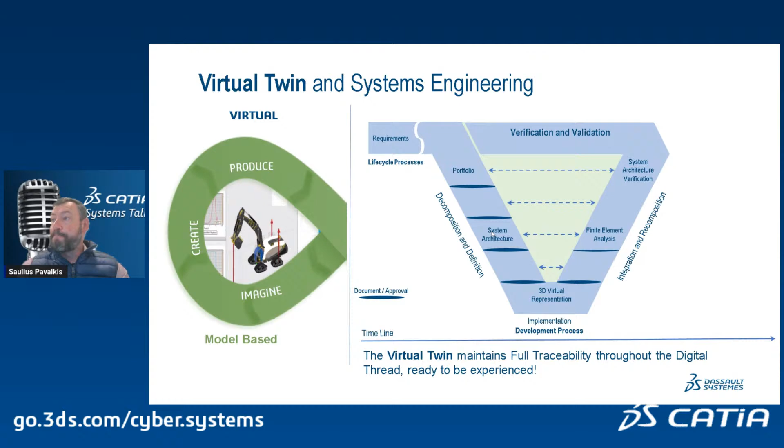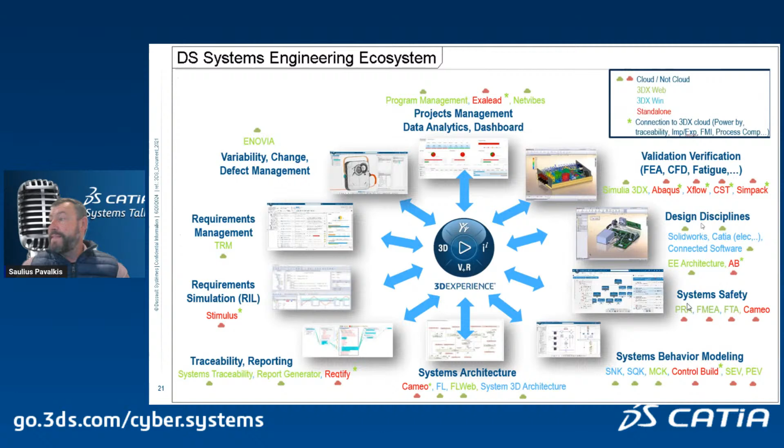From the DS perspective, the DS has a lot of tools and solutions for system engineering that would include project management, configuration management, requirement simulation, traceability, digital thread, system architecture, as you can see here, CATIA Magic. System behavior simulation, multi-physics simulation with Dymola, safety analysis, design disciplines like mechanical, electrical design, and then validation and verification.

Now going back to our SysML model of integrations, here you see CATIA Magic, Teamwork plugins, Teamwork Cloud, and here we see updated relations to 3D Experience platform and standalone apps. So this view is from our internal alignment perspective in the company.

So we have Power'By, like SSP standard, which we discuss in this presentation. This is coming as a new thing, and you can find this model and presentation of this model actually in the community post. Here is the community, and here is direct link, so those slides will be shared, and you can copy direct link if you wish.

So now in part 2, we will talk about model-based design reviews, which is one of the major scenarios of the application of model-based digital engineering. Then we'll talk about Power'By in connection of one of the integrations like SolidWorks. Then we'll talk about server-side simulation, Internet of Things, and hardware in the loop. Wire harness, which is very good alignment between system engineering and electrical engineering. And we'll show new samples, system virtual validation sample and solution, and cyber system governance for software.

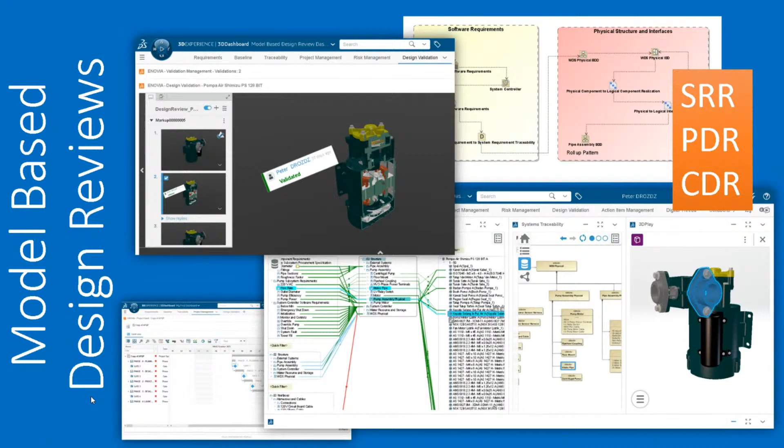So from model-based design reviews, why is it an important scenario? Because design reviews are done as a formal process to approve a next round of financing. So if you pass design review of your product solution, you can expect that maybe some issues will be found. But then after review of the design, you will be granted next level of finance, and you can continue working. So this is very important, not only technically, but also a very important business step.

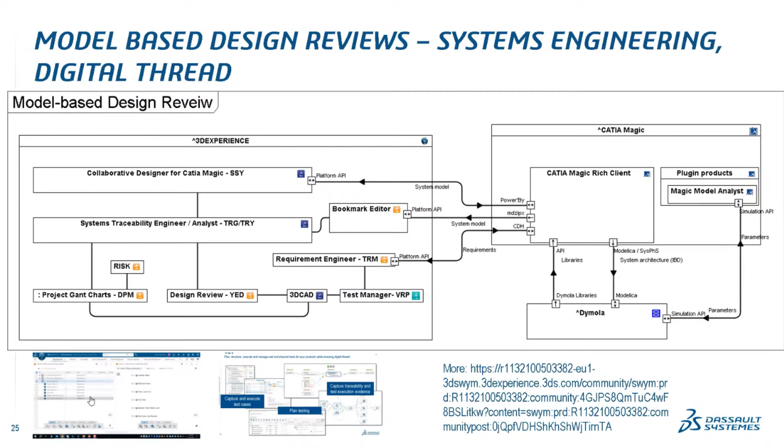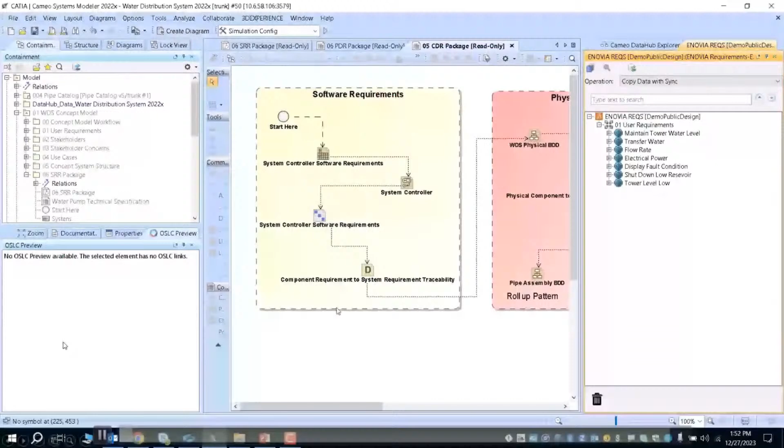And it is mostly performed in the non-virtual manner, but people still gather together, still have PowerPoint, still have data coming from PDFs and Excel. And what we suggest, there is really no limitation on making it digitally already.

And we are demonstrating in this scenario how this process can be integrated through 3D Experience platform, through Cameo, CATIA Magic. Then we are delivering system architecture requirements and the high-level design from SysML, and we are integrating with the detailed design, and we have tasks, we have risks, we have gateways, we have checklists where we can upload, where we can collaborate, where we can manage baseline and deliver collaboration on the specific review digitally.

Here you see dashboard, which consists of requirements, baseline, traceability, project management, risk management, including requirements. Here we see baseline of the artifacts which we are delivering. Every tab has associated specific app where we can perform a task dedicated for that role.

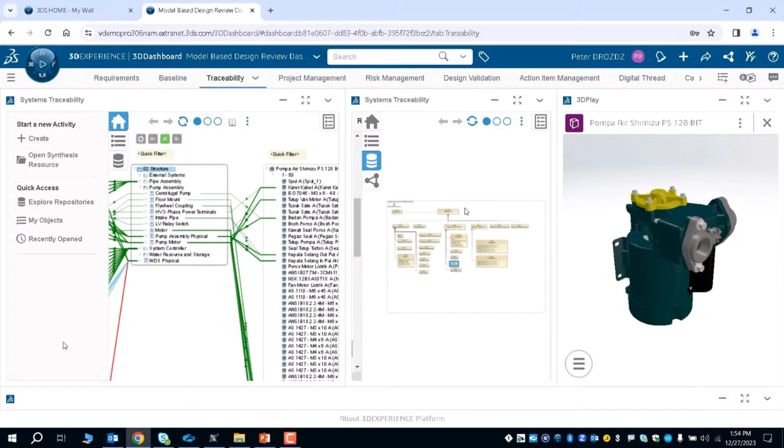So this process is one of the best examples how we can reuse digital engineering ecosystem like 3D Experience platform for model-based system engineering needs, because we want notifications. We want integration to the design. We want collaboration applications like for 3D mechanical collaborations to review that data. We want to gather and govern baseline of the data review. And we want that it all would be digital and all collaborated between different roles with different dashboards.

So this process is actually available. You can find more about it. And every part of this presentation has a link where you can actually see more on this topic, including on this one. I will not go through this whole presentation because this would take more time than we have today. But I can just tell that already like 10 different clients are evaluating and some applying already this process. And this is very promising for the future too.

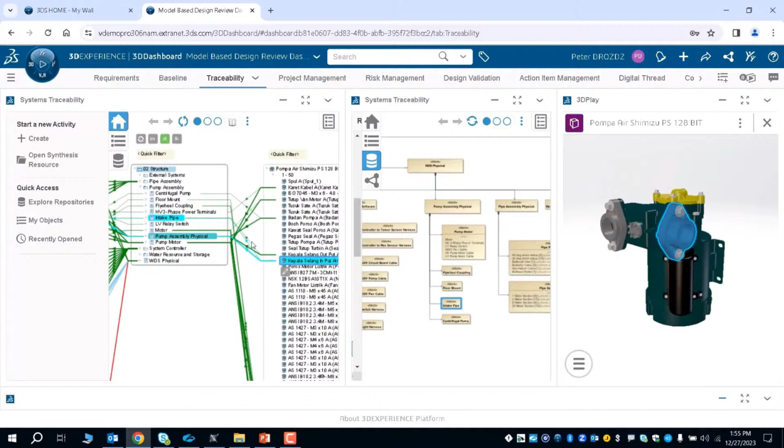Now, going from that perspective, we have integration between different disciplines. So one of the disciplines in mechanical engineering, and one of the common used tools for mechanical engineering, also produced by Dassault, is SolidWorks. And so how we could align between SolidWorks and CATIA Magic.

So there is one way to do it, which would not require actual manual work. Here you have opportunity to commit your project and work, same as with Teamwork Cloud, but with 3D Experience Platform using the concept of Power'By.

So Power'By is the ability to even open CATIA Magic and SolidWorks from 3D Experience Platform, load the data, work on the data with the right granularity, commit the data in the team, you can collaborate, and then the data becomes available, and then you can have the digital thread between system engineering and, in this case, mechanical design and SolidWorks. You can always open this web interface and see what traces to what, on what requirements we are working, but work in the native environment, SolidWorks and CATIA Magic.

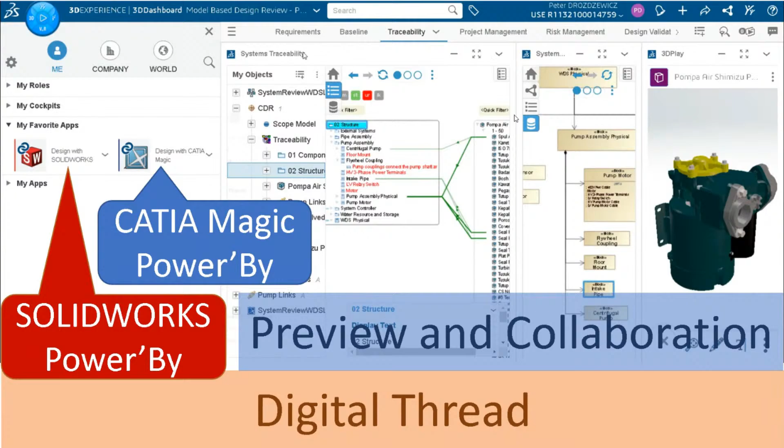So here is that scenario, and again, you can read more about that. We have Power'By from CATIA Magic. We have Power'By for SolidWorks. There is dedicated apps like Collaborative Designer for SolidWorks and CATIA Magic. And then we have digital thread between them, app, Systems Traceability Engineer.

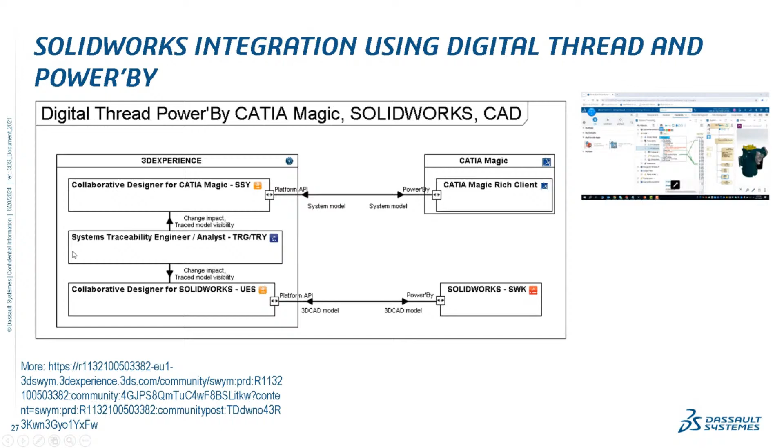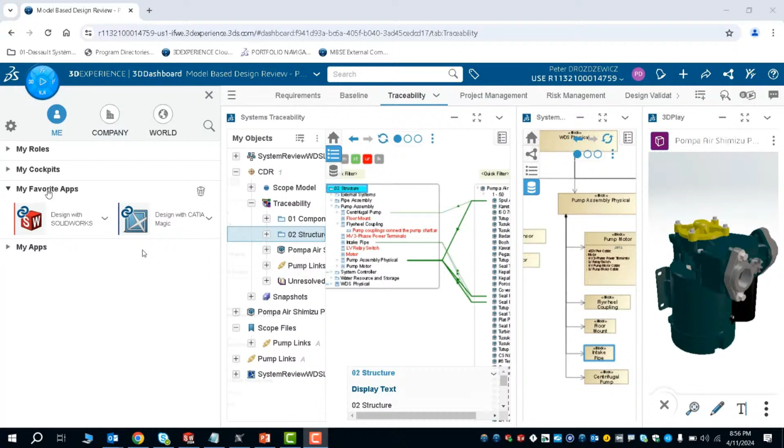Now, how that looks like in action. So here you can see a short video. We have icons, apps to open CATIA Magic. Still, you need to install CATIA Magic separately, but in the future, actually click on that icon will install CATIA Magic automatically. This is just a way to find it faster and start work faster.

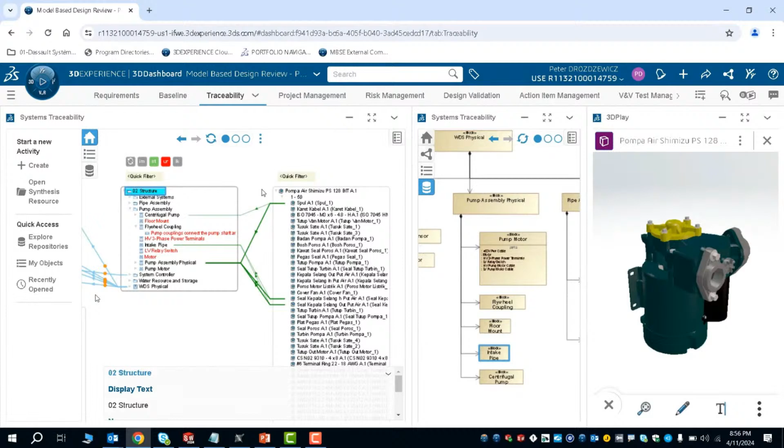And here you can see that the digital thread is already enabled. Here you have traceability from requirements to system architecture to the mechanical design. This is performed here manually by knowing what to implement, what is actually on what part in the SolidWorks we are working, and what is the pretty much system architecture which it needs to implement.

And that traceability in any case is needed, right? So just here we will elevate the level of that system traceability from pure requirements to actually models. So then we can know if we change the model, what would happen.

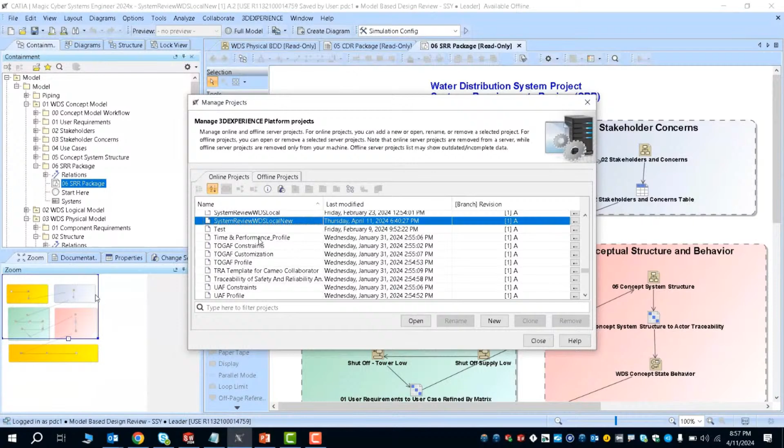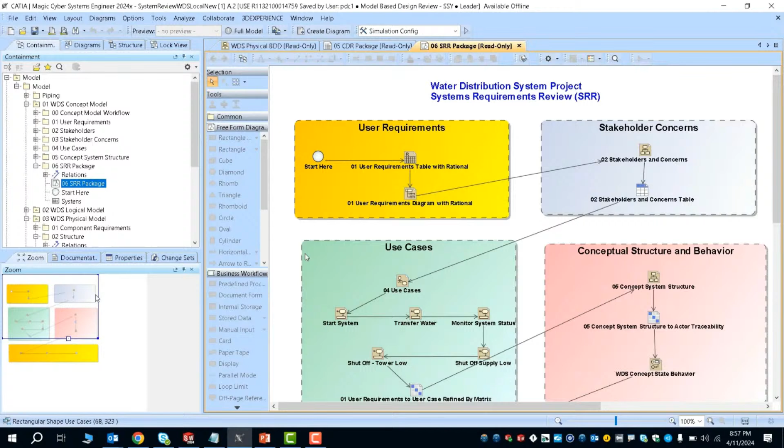So here you see actually we are committing project data from CATIA Magic using Power'By, and we can see projects list. And this looks like Teamwork Cloud. It's actually just alternative for Teamwork Cloud when you work with 3D Experience Platform. Then you are working directly, committing data to 3D Experience Platform. Same works from SolidWorks, and then the data becomes available for trace, for analysis, for the rest of the workflow.

Here we see in SolidWorks how that looks like. You see the screen on the right side, that's connection to 3D Experience Platform, ability to load the models, and you see I'm connecting to the 3D Experience Platform. I'm loading the model, same Power'By concept, same way to work. You load the data, you work on the data native app, and then you commit the data to get the rest of the workflow accomplished.

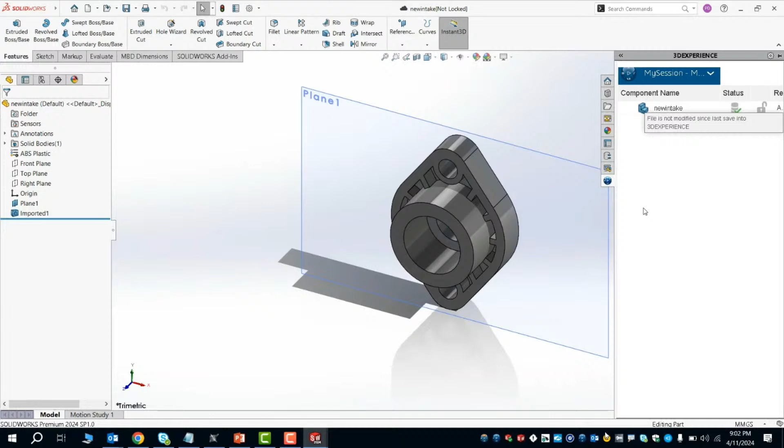So here we see we work with the data, we load the data, and when we are ready, we can upload the data back. You can work on part of the model, you can work on full model. And here we have this full digital thread. Okay, that was Power'By with the SolidWorks and CATIA Magic.

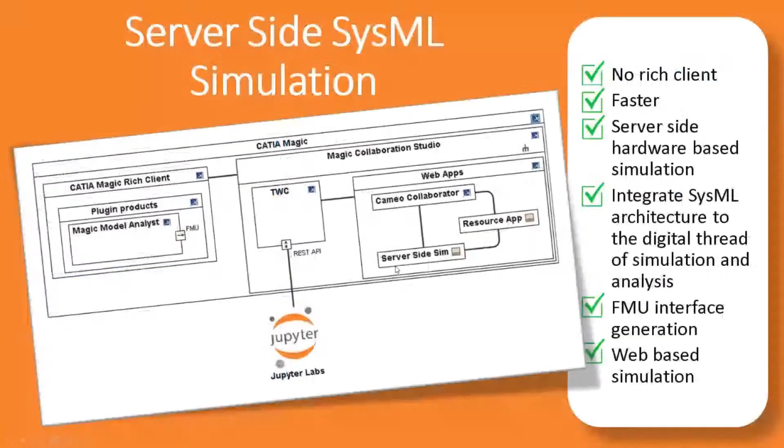Now let's switch the gears and let's talk about server-side simulation. This is simulation which we enable SysML, UML, UAF simulation directly in Teamwork Cloud side. What do we get from that? We get ability to run simulations faster, the ability to integrate those simulations because now you don't need to run client-side software to execute the model. You can generate FMU to server-side. You can use web-based simulation interfaces.

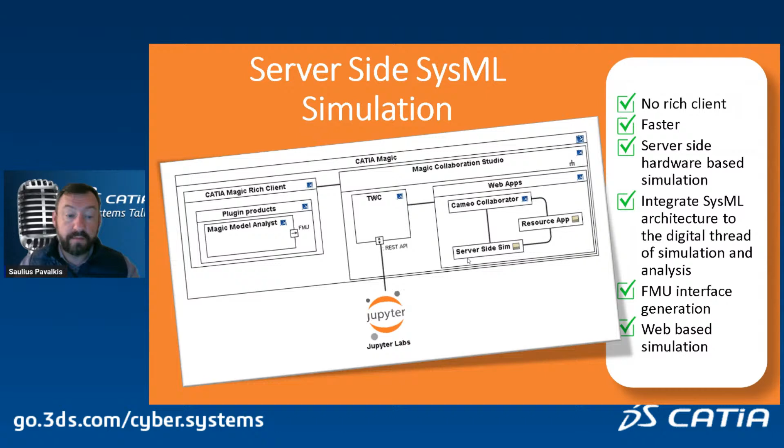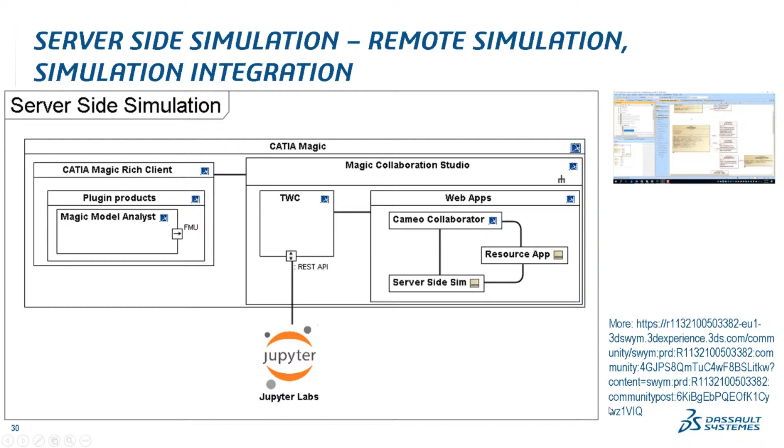So how that looks like, here we have architecture of the solution. We see Teamwork Cloud through REST API, and one of the clients is like Cameo Collaborator, another client is Jupyter Labs. And here again is the link in the MBSE community where you can find more about this. How this works, let's see short video.

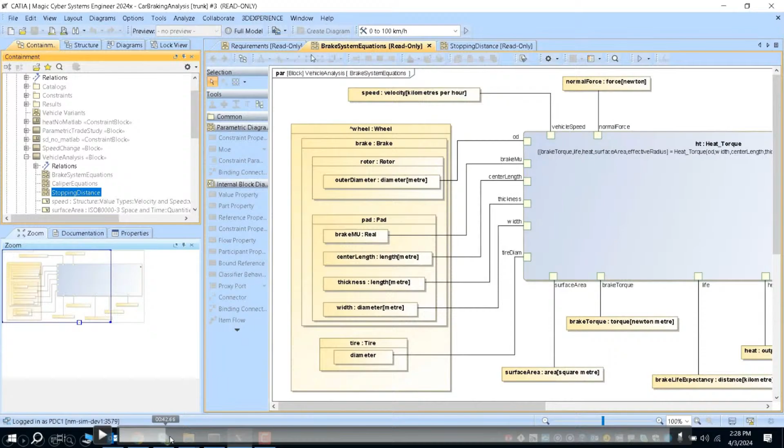So here we have sample for car brake analysis. And that sample is committed to Teamwork Cloud. So once it is committed to Teamwork Cloud, you can run it from Cameo Collaborator. You can run from Cameo Collaborator directly changing the input values and executing here. And following release, July 2024 refresh one, you will be able to see in Cameo Collaborator even visually diagram simulation. So states, activities, visual drawings will be in Cameo Collaborator, animated visual diagrams.

We can also run the simulation through Jupyter Labs, so you can connect to Teamwork Cloud, execute the model, get results, compare results between different models, connect to other tools, and execute. That's how simulation orchestration is performed and should be performed in the future with other tools.

Here we see a web interface running simulations from Cameo Collaborator. In the upcoming July release this year, we'll have even diagram simulation inside of Cameo Collaborator.

Another topic is hardware in the loop. This year, and actually a few years ago, we spent investigating the best methods to make a connection from virtual to real. This topic is very big because there are a lot of different hardwares, and we have a few solutions for that. Let's concentrate on CATIA Magic integration to Internet of Things and the hardware in the loop topic.

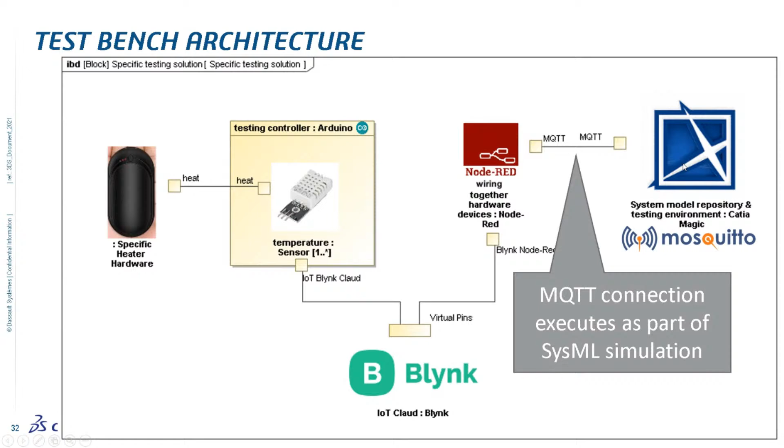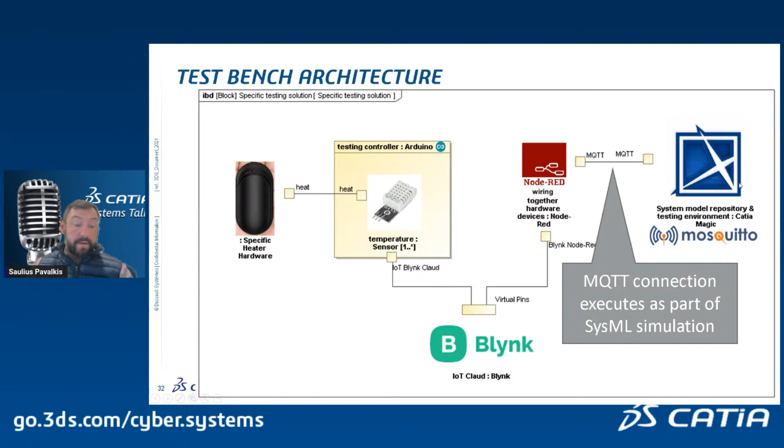In this sample, we use Node-RED to connect to the IoT platform Blynk, which allows you to access data anywhere in the world because it runs like on a server. Then through the hardware, the hardware is publishing to the IoT platform. This is not a must integration; it could be hardware to CATIA Magic directly or somehow else, but we just wanted to have a flexible interface here.

As you can see here is the usage of the MQTT library. We have open connection, where we specify what server we are connecting to, and the credentials. Then we have publish, so you publish on a topic, and that's it. You just choose the topic where you publish, for example property name—that's the topic. And then you have subscribe.

Subscribe is to wait for the topic. Here we subscribe—actually this is the subscribe, so we are sending data to a specific topic. Actually, we are sending the topic here to subscribe, and then we get the data back. In case of publish, we are actually sending the topic and the data, because we need to publish to a specific topic. And that's it, that's how it works.

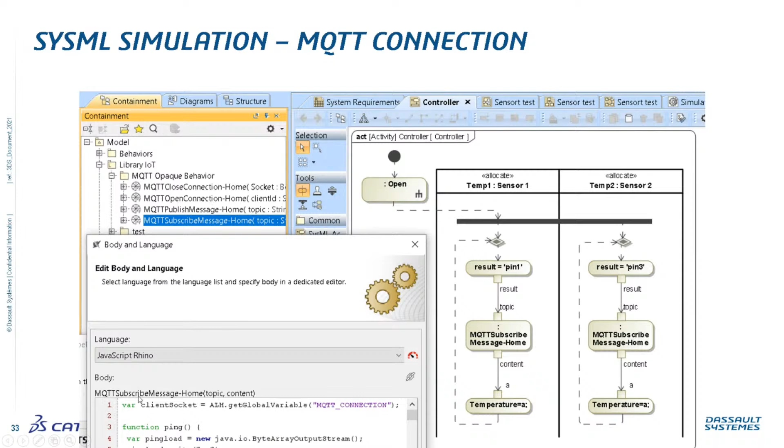You don't need to be an expert on that library implementation; you just drag those blocks and you get results. Here we have a sample which demonstrates that you can actually read the data of temperature from two sensors connected to hardware.

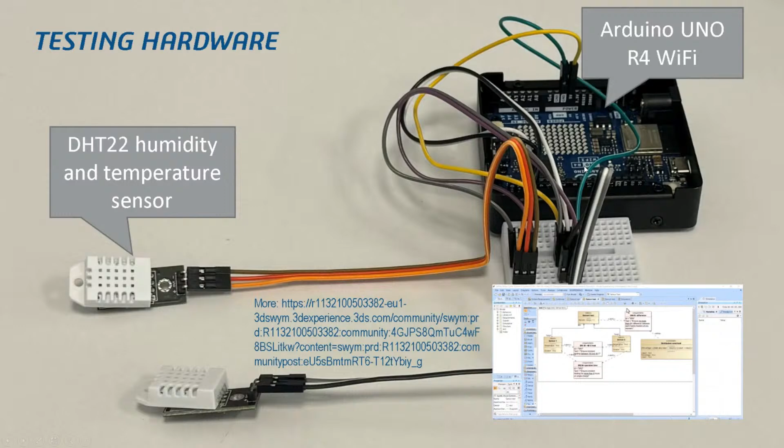That hardware could be like Arduino, could be ESP, could be Raspberry Pi, could be anything else. As a result, you are reading the data into the model, and in the model we have requirements, we have system architecture, just as you would model without any kind of extra things. As you see, this model is not overcrowded with mechanical structures to integrate, but it uses that library—those four, actually almost three, opaque behaviors—to publish and subscribe to the topics. That's it: from those topics, which are like properties, you get updates and you send updates.

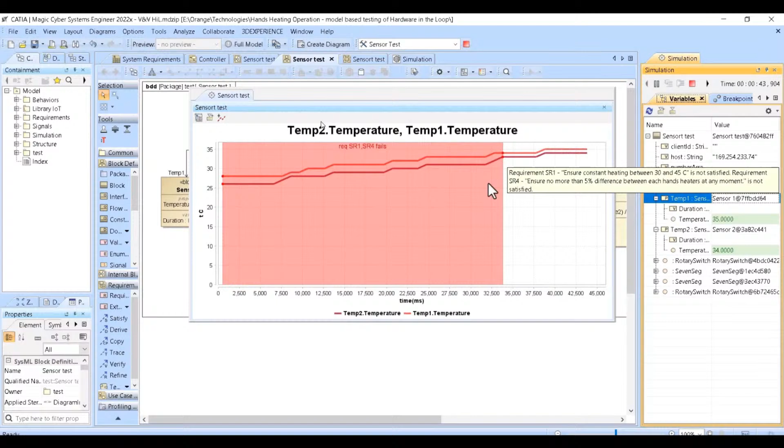Here we see two requirements verifications performed. The requirements are, in this case, that the difference between the sensors is no more than 5%. So if we have heating equipment which needs to stay within some boundaries between each other, this tests that, and also that the heat reaches the target level in the right amount of time—how long it will take to heat from the room temperature to the right amount.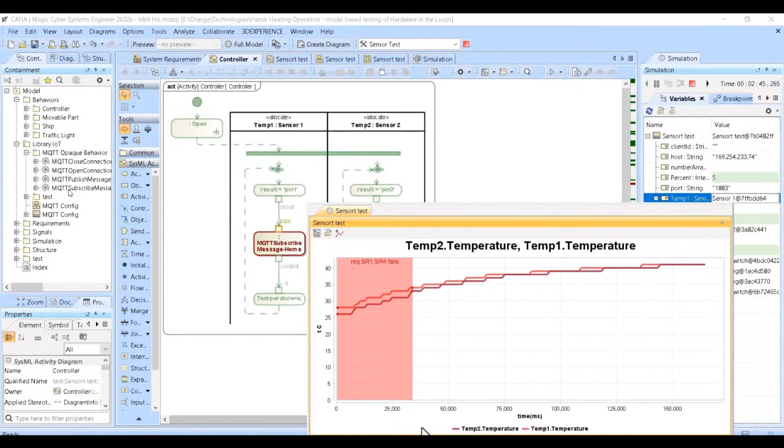Here is the library you can download that will allow you to communicate with MQTT. MQTT is supported directly by hardware, so you can connect directly to the hardware through the MQTT server. Here we are using Node-RED in between, which is a low-code connection interface, open source.

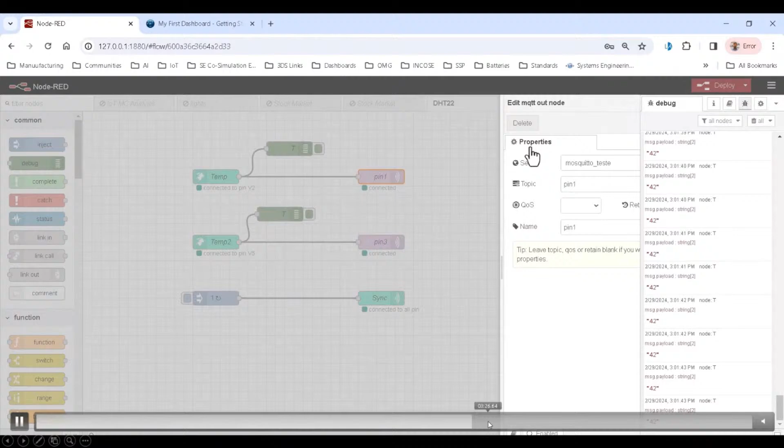Why are we using it? Because it allows us to have 5,000 connectors to anything else, and also we are using Blynk. Why Blynk? Because you can access dashboards remotely from your mobile phone or elsewhere, and communicate with this IoT software anywhere in the world to gather data, for example from tractors running in your field. The data doesn't necessarily need to be consumed by Cameo—you can store it in a database, but Cameo can check the architecture real-time, optimizing that.

So here we see this dashboard, and this is the Blynk-specific IoT solution.

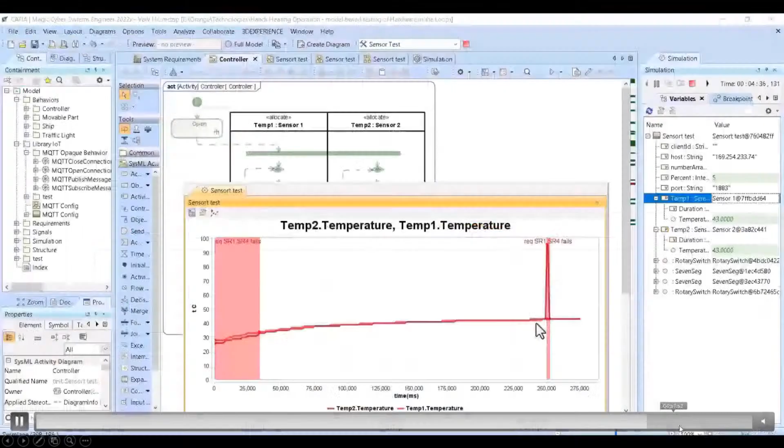Now let's switch to another solution where we have an updated project for eVTOL, demonstrating electrical integration and 3D wire harness. In this case, the architecture is that Cameo is providing requirements and system architecture, and all of that is used in traceability to the electrical 3D design, system design, which is the schematics, and all of that is governed by traceability and baselines.

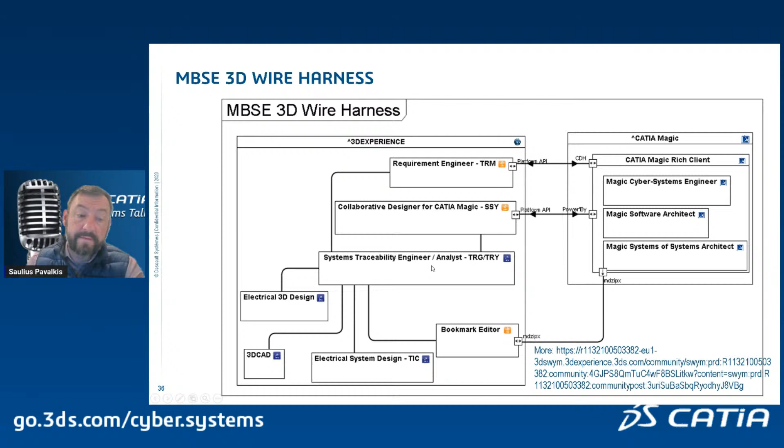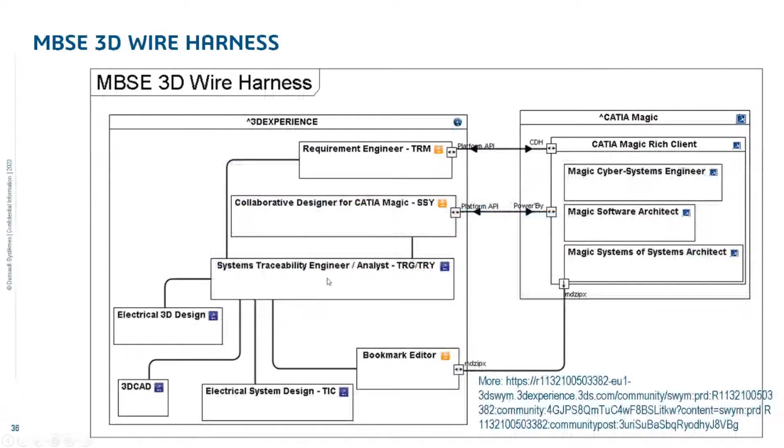So here we see the full picture: we have requirements and user needs coming from the system architecture. What we did here is actually done by my colleague, Pedro—you can find his presentation under this link, and I encourage you to check the full presentation.

What he did is create a system model from the beginning to the actual integration into the eVTOL model, concentrating more on system architecture and how that integration should work from the traceability side, not the automated generation side. This is also valuable because in many cases we're not transforming the architecture between steps, but recreating another abstraction level in the dedicated tool based on our task and requirements. So that's what's demonstrated here.

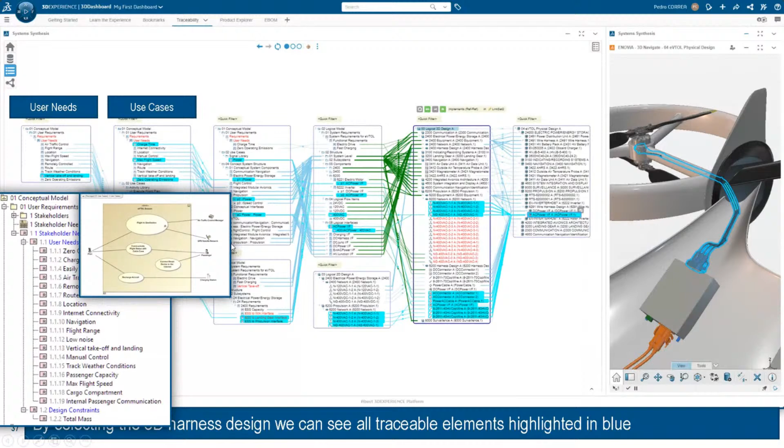So we have user needs, we have use cases, and you see they are traced. We have a conceptual model with high-level decomposition, then a logical solution architecture, with logical ports like power control—a very important, small but rich architecture in solution data. And then we have the 2D electrical model schematics.

Where we see where the wires will go, what the actual electrical connectors would be. When we talk about logical solution architecture, it includes everything—fluidic interfaces, control interfaces, mechanical, and so on. Here we have already the electrical design.

So we've concentrated here. In parallel, we would have fluidic and mechanical design, but we are already working on fluidic design and will show you a bit of that. And then here we have the 3D wire harness.

So we have the 3D wire harness—equipment placed in 3D and actual wires—and that's how the harness is designed. You need to know how long those cables should be, what type of cables, and all the interferences, in order to manufacture them in advance and then install them correctly with the brackets—not too long, not too short.

Just the right ones—we can't manufacture them on the plane, we do it in advance. That's why we do this whole process, and we have it integrated.

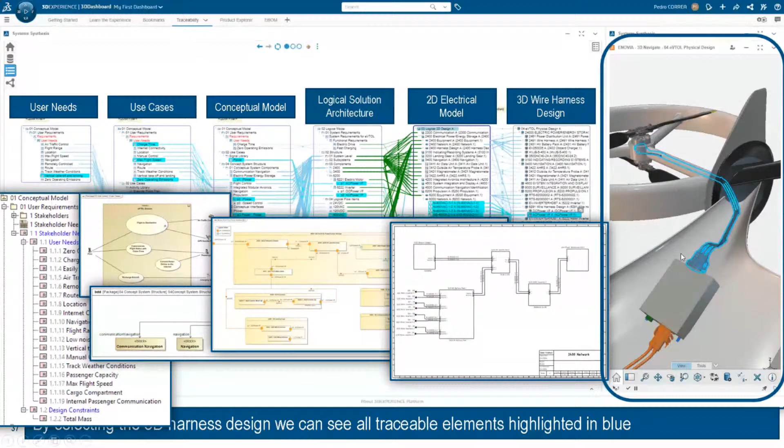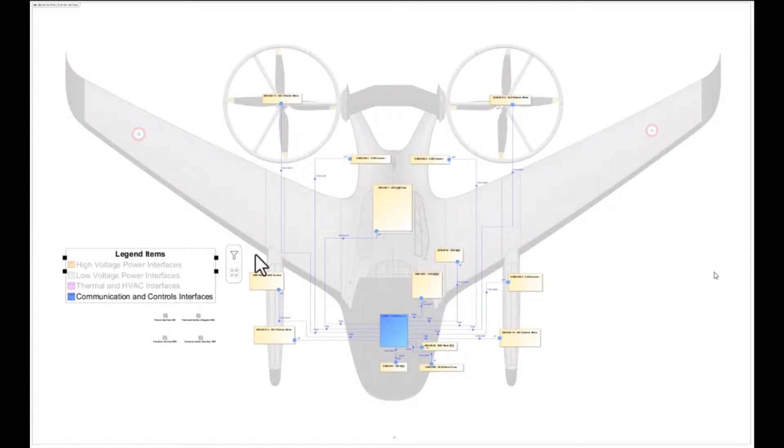Here we see already fluidic interfaces, and that's our current job—to make this fluidic integration and show how it will be impacted by the system architecture process and changes. You can already see that even right now, system architecture interfaces like high voltage, low voltage, thermal communication—those interfaces become busy.

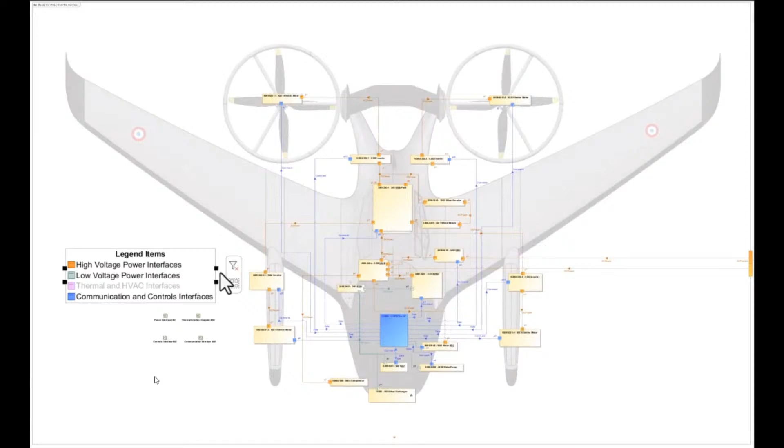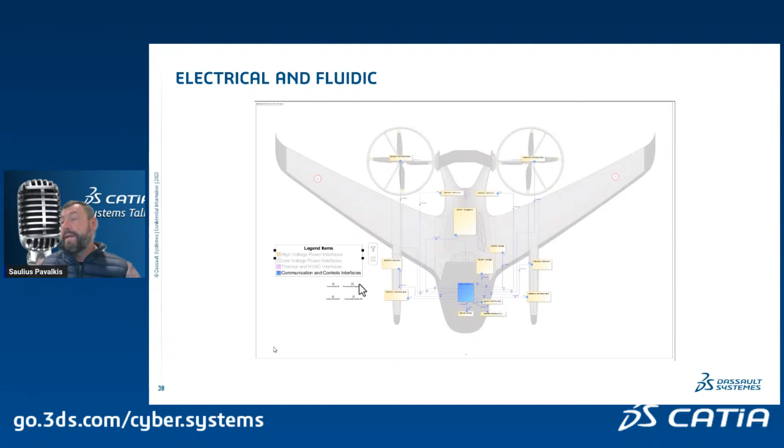We have a crucial, essential capability: the ability to filter based on use case or interface type, so you can communicate architecture and present it correctly to require stakeholders to manage that architecture and keep it up to date. Otherwise, there's no way to manage large architectures—they become disconnected and stay just as documentation, a snapshot at some point in time. This capability is very easy to use and lets you get the most from solution architecture and MBSE in general.

This is one of the enablers of MBSE—filtering by legends. Those legends could be automatically extracted or manually generated by applying legend items to the required parts and interfaces.

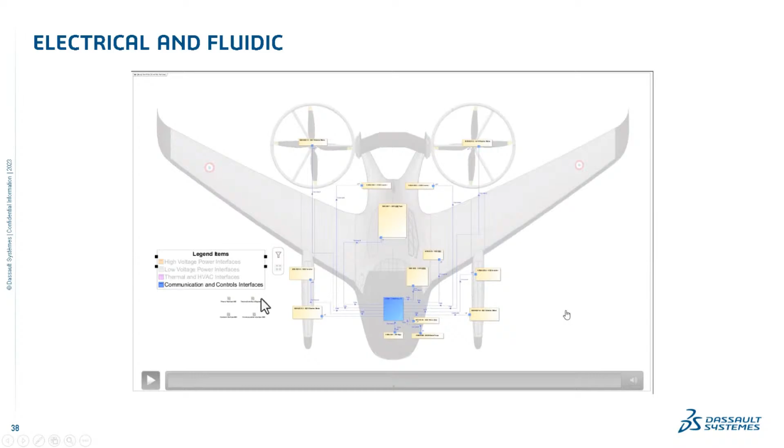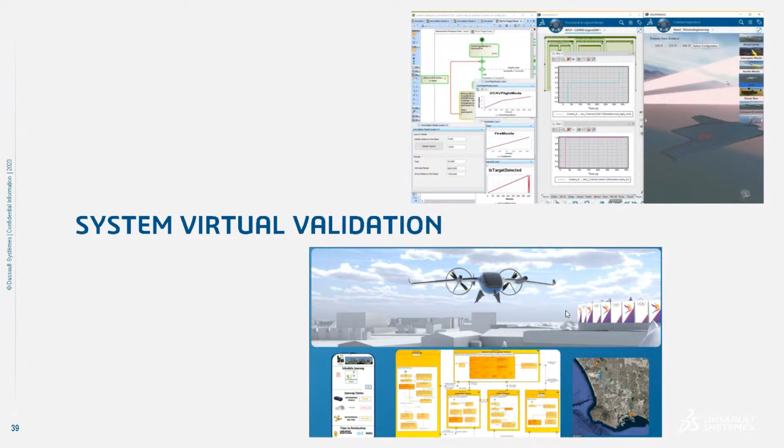Now going to virtual validation. This is a very big part of system engineering. When we build a product, we want to be sure it is accepted by the users, and again, it's part of the business process. You show the product to someone and they will say, okay, this solution is okay, or how to install this part, which cabin is better, this or that. And we have a solution in Dassault.

It's called 3D Excite is the brand, and the app's called Creative Experience, and it can integrate with system engineering, as you can see here, and it allows you to run the system architecture in the final stage through the scenarios, through the actual implementation, as if it would be already done.

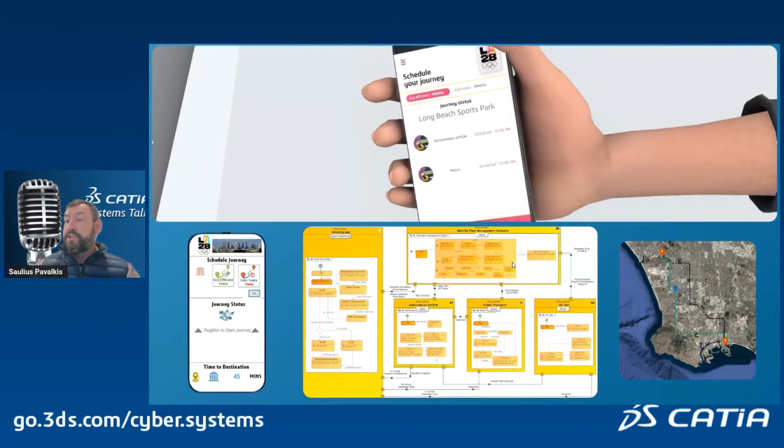As you can see here, we are leveraging server-side simulation, a web server for simulation to read the simulation data. There's another way to do it through FMU, and you can integrate and run the simulation, clicking the buttons in the UI. That could be here, as in CATIA Magic UI, clicking and running through the process.

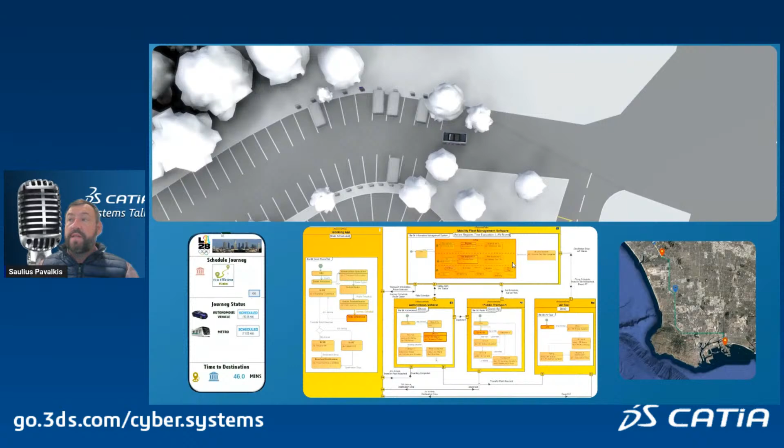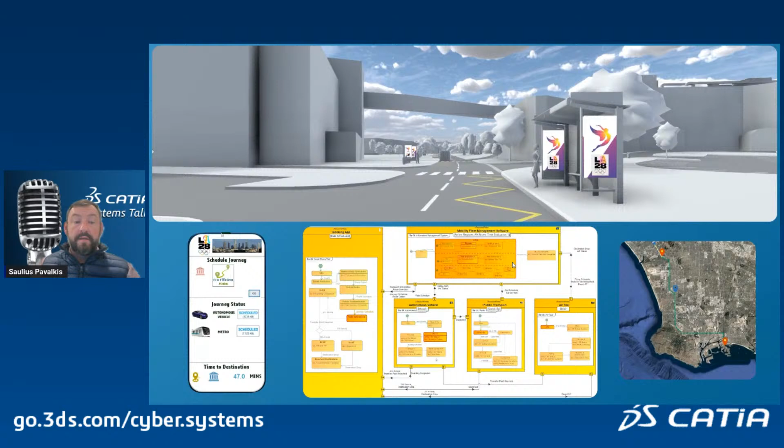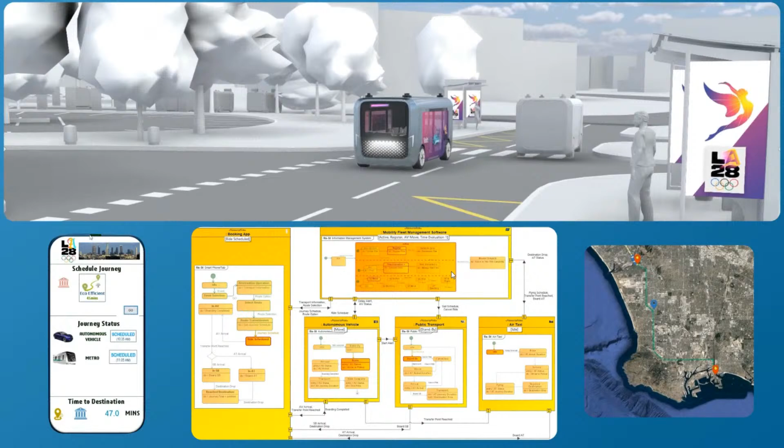So if you have some ideas on system architecture, you can validate them today with the users who will need to accept them. So here in this scenario, we are calling the autonomous Uber, and based on the availability, we get another Uber available, and this is Olympic town where you get those Ubers arrived.

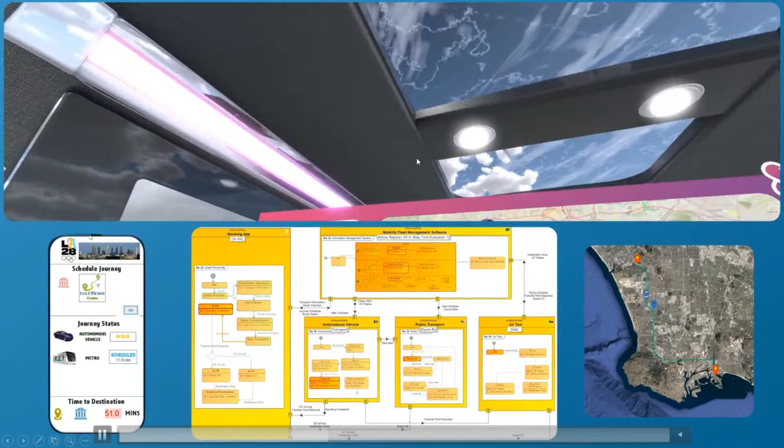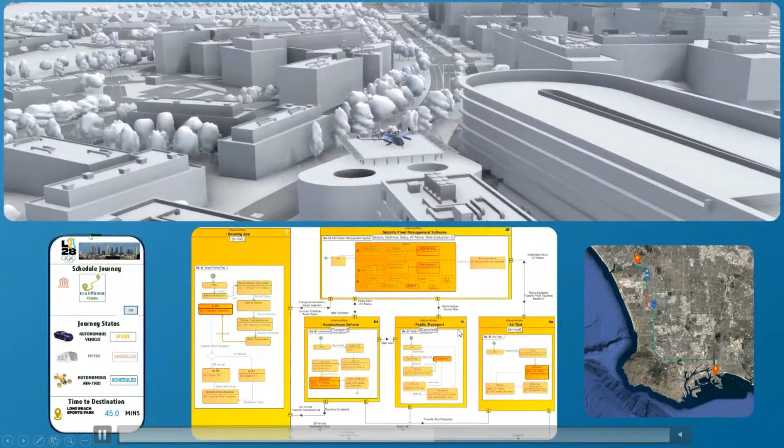And as you can see, it's not limited to clicking in the user interface here in CATIA Magic in SysML. You can actually also click in the 3D environment. You can have 3D glasses, overview what's happening, and also run different scenarios when, for example, the vehicle is actually an eVTOL, which we were designing electrically. Now it is actually mechanical already with the scenarios and can execute and run.

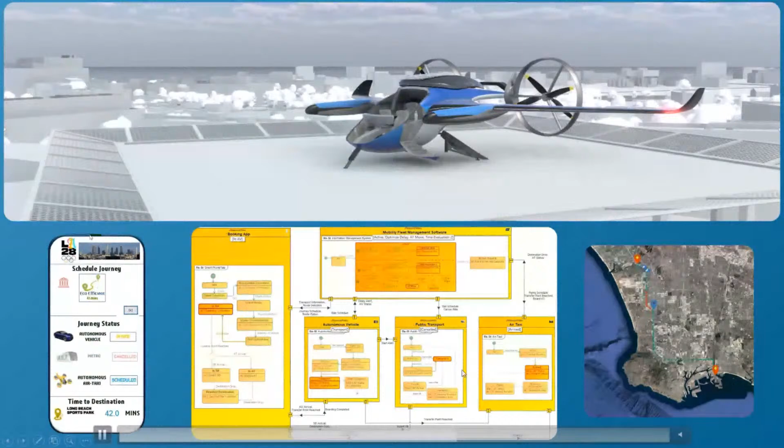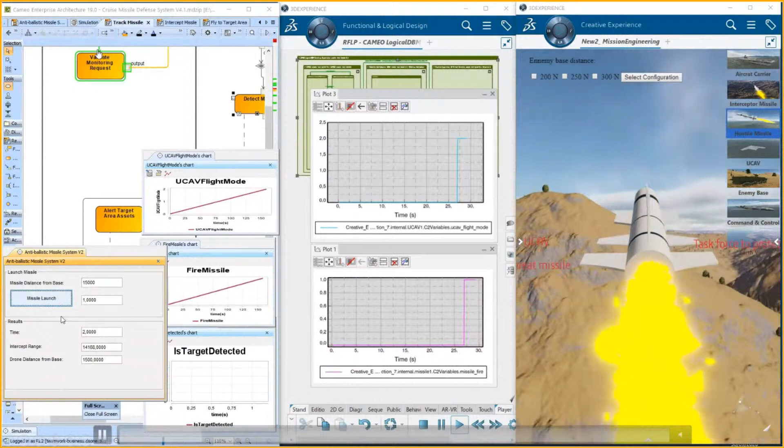Another scenario where we have mission engineering, where we have a mission, we have some events happening and we need to react to those events. We have drones, we have planes, we have radars, we have all collaborations. So mission scenarios executed from the CATIA Magic system.

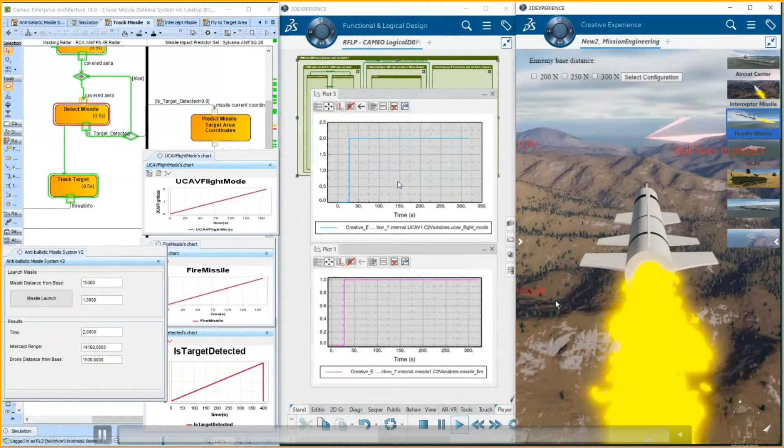Multiphysics is calculated with Dymola running on the platform, calculating parameters. And that shows that we can actually run multiple tools integrated through simulation in real time. Would it be 3D? Would it be multiphysics simulation? Would it be robotics simulation? All of that can run and produce results, requirements verification results, but also user validation, acceptance of that scenario. You run scenarios, you get acceptance of those scenarios.

Okay, now going to the software piece. Software is actually a very big part of current systems. And here, what we are releasing in July will be agile collaboration capability. This is a plugin in CATIA Magic where you can mark parts of the requirement model with items from this agile plugin, and those items, like epics, as you can see here, capability, feature, story, based on that you can automate item synchronization to external environments. In this solution case, it is Jira, where you get this information automated, and that enables workflow of agile collaboration.

Another part of that is that you can keep that in trace. And one more part of this is a little bit different: extended capability for code generation. So now, as you know, over the last few years we were working on code generation from the behavior diagrams like states, blocks, ports, properties, and activities in recent releases. So a big subset of SysML.

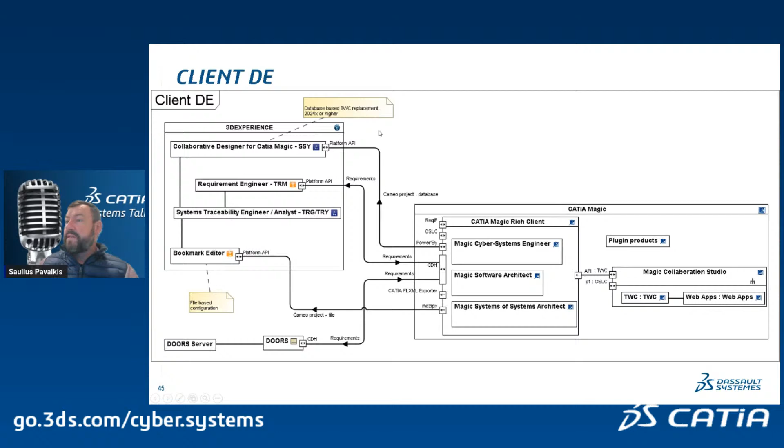So you need to build almost an enterprise architecture for that. What is enterprise architecture? It's what solution we have now, what solution will be tomorrow, and what is in between. You can start building that without big effort, just creating the solution architecture of the current state, maybe with alternatives if you have them in the company, and then building the future state.

What should be the solution architecture which we will provide, and that can be in the same project. You can drag those, you can download our SysML model. You can create your block, like my company solution client digital engineering architecture, drag CATIA Magic, drag 3D Experience, show the apps with interfaces, connect them, create external apps, and then you will find DOORS and DOORS Server in that same project.

Create external apps with interfaces, connect them. Those interfaces from CATIA Magic already exist, from server side already exist, from 3D Experience platform related apps already exist. Connect them together, show what data flows, and that already gives a big part. As you know, solution architecture is not something which is optional.

This is the biggest value of model-based system engineering, because it allows you to communicate the decisions and how the system works. So we can communicate that, and with the item flows you see dragged, we can help understand what flows where, so requirements flow between requirements engineering and the 3D Experience platform both ways.

Through Data Hub, to CATIA Magic Rich Client. That helps a lot. You can also create an activity diagram with swim lanes across those apps to show the exact process, how that will happen. This is especially needed if you're introducing a new connection and need to explain a hundred times, okay, that's how it will work, that's how it works.